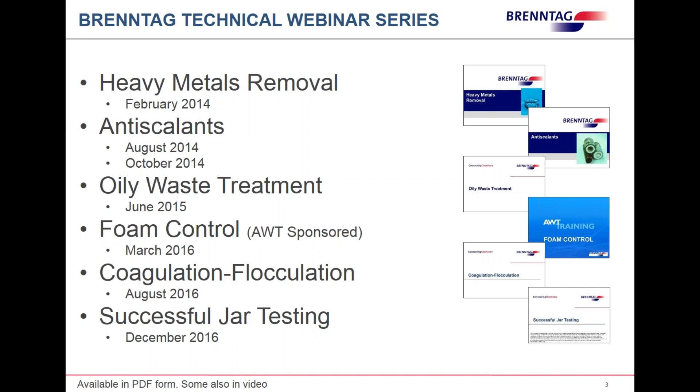Just to recap, our successful jar testing webinar lends itself to a precursor for this particular presentation, and these are just some of the topics we touched upon during that session.

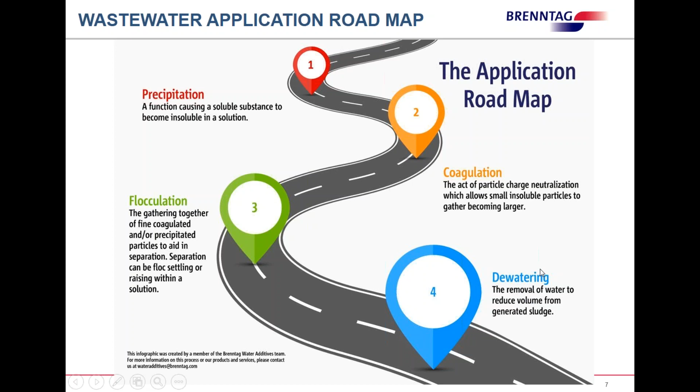Now, every successful trial has to begin with a jar test. This is a procedure that simulates as best we can the actual process of the wastewater treatment plant. In that, we use differing chemical doses and mixing speeds, and then monitor settling times or floating times, whatever the case may be. This is a way of estimating or providing an estimate of parameters in the water treatment program.

So what we're trying to do in the jar test is duplicate the system operation, check product performance, make system adjustments, make treatment recommendations, and determine the best program available to us.

In this process, it's important to make very good notes, as we'll cover in a bit, but also you want to be able to show your customer, once you've arrived at a process you believe is the best, to help get them to buy in - and this is another thing we're going to discuss later.

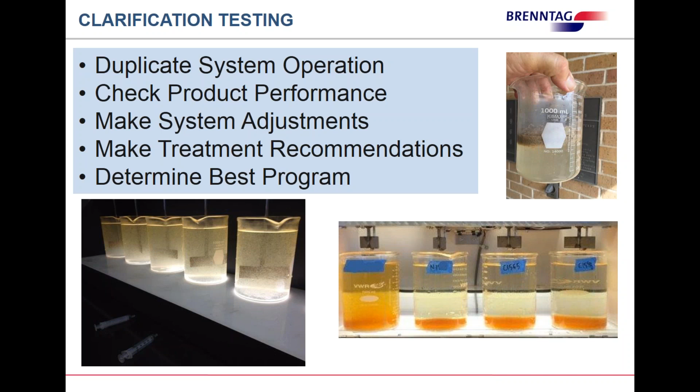Now, Thomas Edison's principles are a very good way to look at jar testing: you understand your customer's problems and get commitment, and iterate quickly to find a solution. What we mean by that is you're going to run multiple tests and run them as quickly as you can to find a solution, and the purpose of running multiple tests is to be sure you've come to the best solution for your customer.

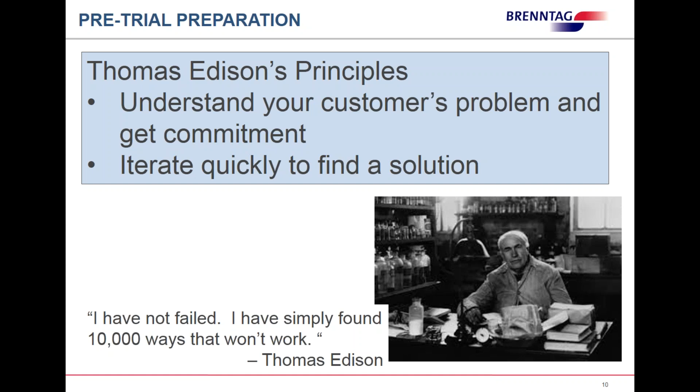And another way to look at jar testing is: I have not failed, I have simply found 10,000 ways it didn't work. Our webinar today will discuss clarification and dissolved air flotation.

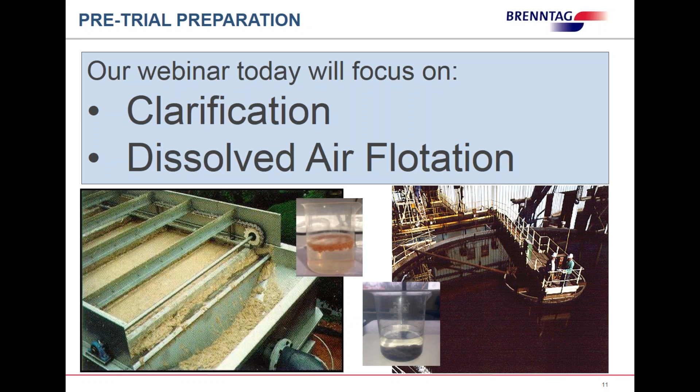What are your customers' goals? This is important in your pre-jar test meeting with your customer, and then you want to also cover these things as you move through into the trial phase.

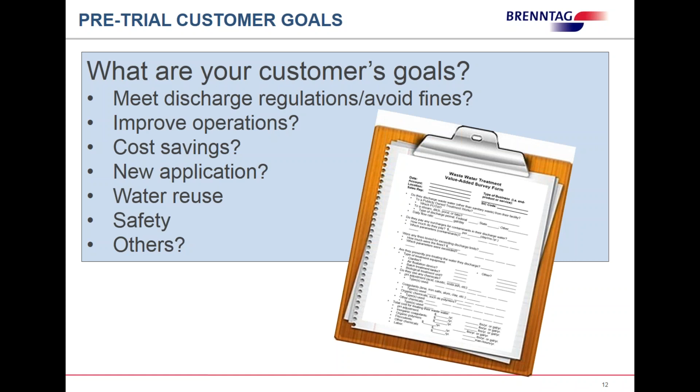You want to know, are their goals to meet discharge regulations to avoid fines? Is it to improve operations? To provide cost savings? Is it a new application? Is there an effort to reuse the water that you're clarifying? Is it a safety issue? For example, are they currently feeding a chemical that they'd rather not handle and get away from? There could be other reasons, but those are all things that you need to qualify with your customer to be sure that you have a very clear understanding of what their goals are and what your goals should be.

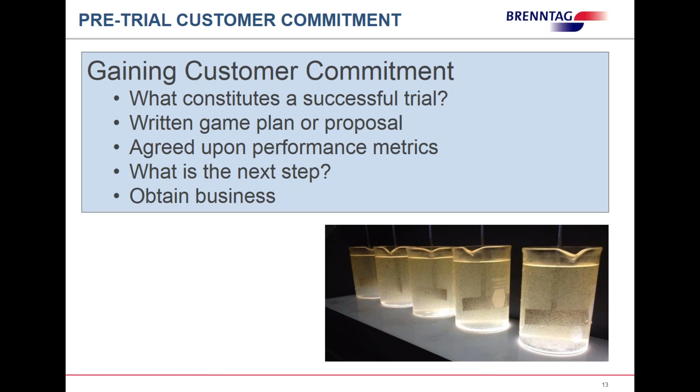This helps gain your customer's commitment, and what you want to do is have them agree with you as to what will constitute a successful trial. You want to provide a written game plan or proposal with agreed upon metrics, and then what the next step would be at the conclusion of the trial. At that point, we hope we will have attained the new business.

So we get customer involvement, management involvement, and this is important. You really need to know, just like any other sales situation, who the decision maker is, and also who needs to be included in all updates on the trial. It's important to know the customer's schedule, in particular if that decision maker may only have time to see you at lunchtime, at the end of the day, or first thing in the morning. It's important to know that so that you're not just standing around waiting for them, barging in on a meeting, or making them feel that you're putting them out.

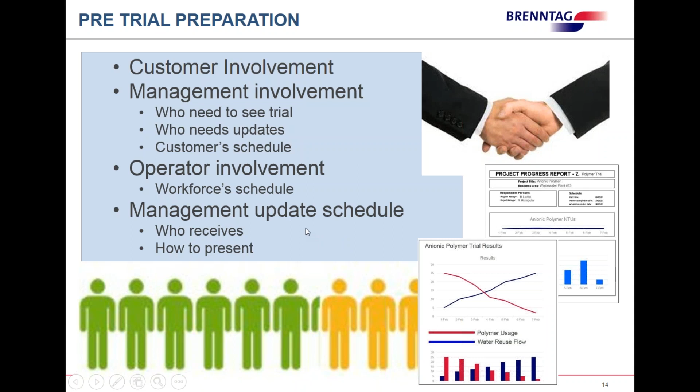It's also very important to have operator involvement, the people who actually will be charged with the day-to-day operation of your chemical program moving forward. It's important to know their workforce schedule, and then the management update schedule - who receives it and how to present that to the person. That could be what time of day, or would they prefer an email, or an oral follow-up. In either event, I would always recommend that you follow it up with written communication, either email or a letter, after you've met with the person, just to rehash everything and put it down on paper - what was discussed and any objections or agreements from those discussions.

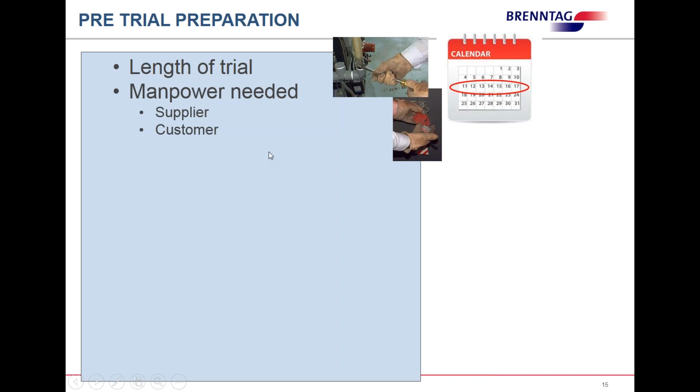Now, it's important to determine what the length of the trial will be. You're going to need to know manpower, both from your end as the supplier as well as the customer, and that would be the shifts or operators and what their schedules might be. The length of the trial is going to dictate how much product you're going to need on hand.

Your operating conditions come into play. For example, if you had a winery who does most of their bottling or packaging in the fall, that's most likely when they're going to see an increase in their wastewater influent. The production schedule may have something to do with it - that's a good example. But it could also be that one shift over another produces more water just because of the way their process works. And then, of course, you need to know your plant personnel schedule based on these factors.

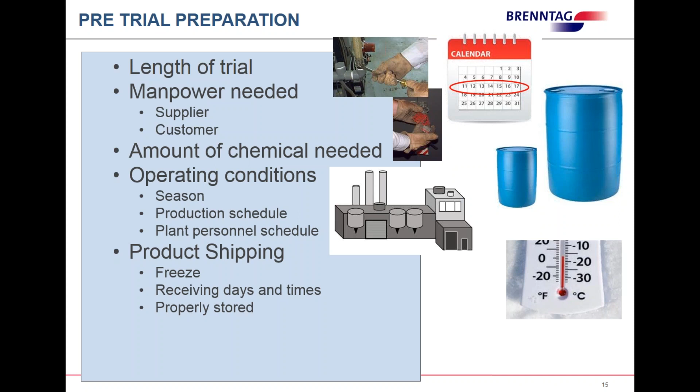Now, this is an important point that I can't stress enough. You want to make sure that you get your product to your customer in good condition. You want to know the receiving days and times and make sure that the product is properly stored. I personally had a trial fail on me because I had product freeze in transit and wasn't aware of it until we got to the bottom of the barrel and found out that the product had crystallized, and that we were not feeding as concentrated a solution as we wanted to, and as a result did not get our desired results in the trial.

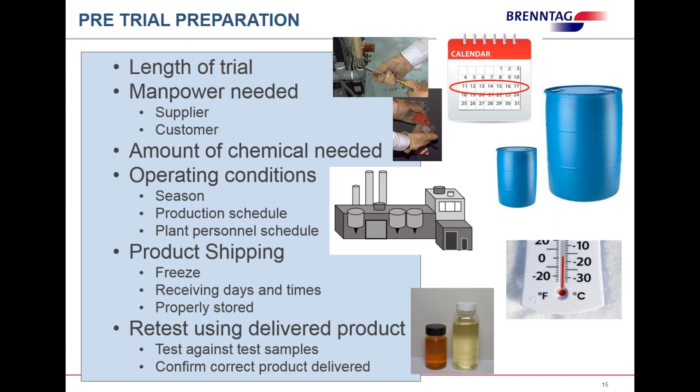This is important, and as this could have helped us pick this up, you want to retest using the product that arrived and is waiting to be put online for your trial. You're going to compare those against your samples that you used to jar test to come to this decision or treatment program to begin with, but then you also take the product you have on hand and jar test a sample with that and compare the results between the two.

Next, we've got to discuss the feed system that you have.

We want to know, is it a new or existing system? Who owns the current feed system? This is important—it could be a competitor, and the competitor may not want you applying your trial using their equipment. So it's good to know that beforehand, so you can make sure you have equipment in place to deliver your product during the trial.

Make sure the equipment's sized properly, that it's accessible, in the correct location. Was it installed correctly, either by the customer or by the supplier who supplied the equipment? Make sure it's operation tested, and does it need to be cleaned? This could be important in the event you have a product that might adversely react with the existing chemistry—could lead to a clogged line, or in the worst case, a reaction that causes gassing or fuming.

You need to know how quickly you're going to turn over the treatment. What we mean by that is, from the point you introduce your product, how long will it take for you to begin to see results in the system?

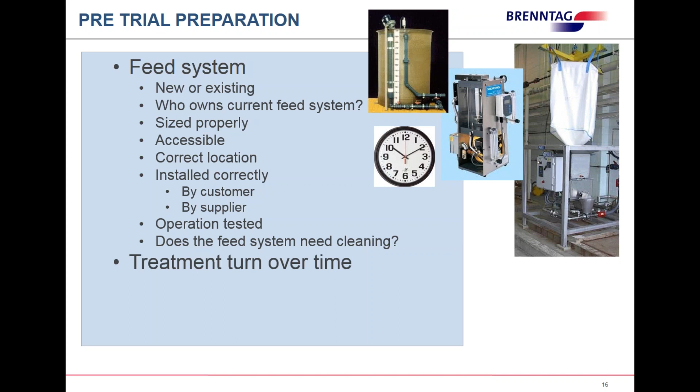Another way to look at this is to check proper feed checks and dosages using drawdown tubes. These are very important and helpful in calculating that you are delivering exactly what you want in the way of product to the system.

Make sure your feed points are proper, where you would like them to be, depending on how your jar test results were. Maybe the feed point currently in use doesn't allow for the same type of agitation you found—if you move the addition point back further in the system, it gives you better mixing and better performance.

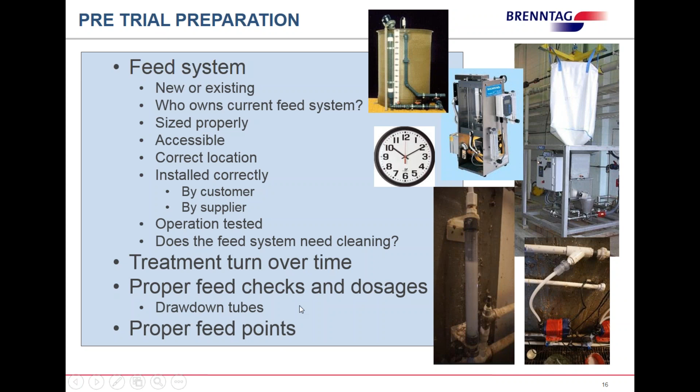You want to take your measurements of the existing chemistry before starting—meaning the incumbent product is online. Take their measurements of what they're feeding, how much they're feeding, the feed points, and the results, then record these results.

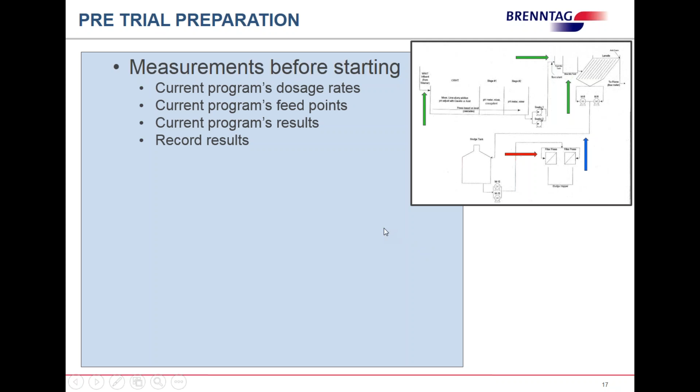You want to start a log now. This is the beginning of a log that's going to help you prove your point that your product performed the way you wanted it to.

Your system parameters are going to be part of this log. You have the agreed upon analytics that you went over with your customer, system flows, and plant production—all these things you want to note on your log.

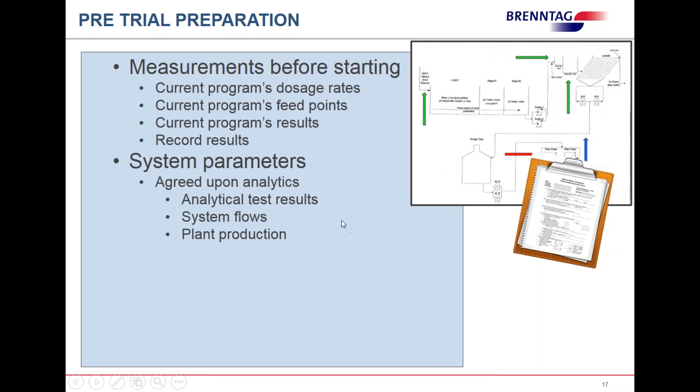You want to obtain your samples before starting, correctly label them, and store them properly. If your customer will allow—as you know, some don't want cameras in their plants—take a photograph, but of course you want to obtain approval first, and get a general feel of the overall operation.

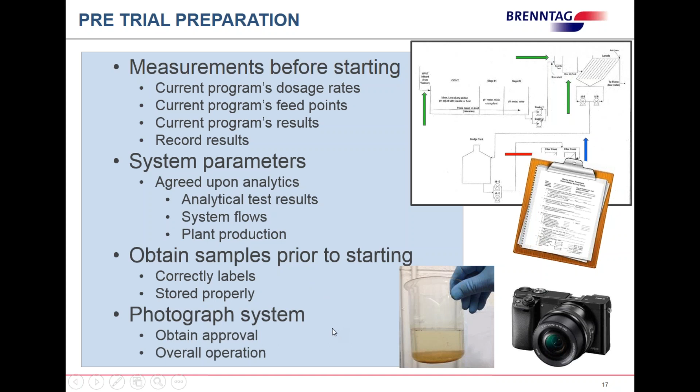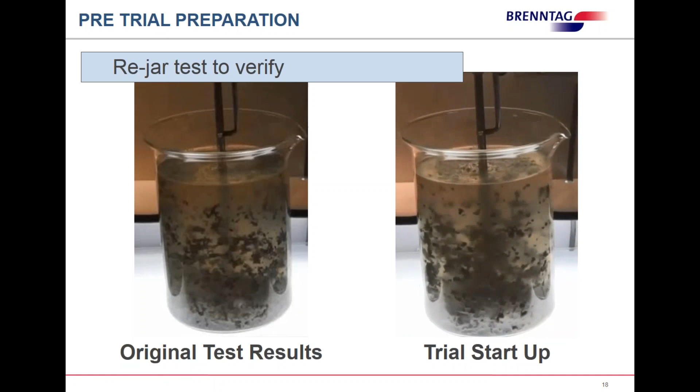Here we're going to discuss the re-jar test to verify. You can see on these two pictures we have the original results on the left—this is the original jar test—and the trial startup on the right. As you can see, we're getting similar reaction, similar clarity, and particle size. All of this would indicate that we have matched what we did in our jar tests before.

Now this is critical—you want to redo the math. You've done all your jar testing, you've dosed. Now you're going to check your math to make sure you can dose everything according to what you just did in your jar test.

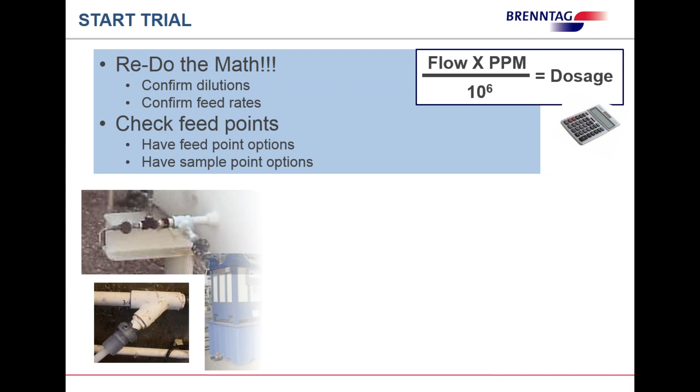You want to confirm your dilutions, confirm your feed rates. Check your feed points again and have multiple feed point options. As mentioned before about where the product is added—does it perform better in a different location?

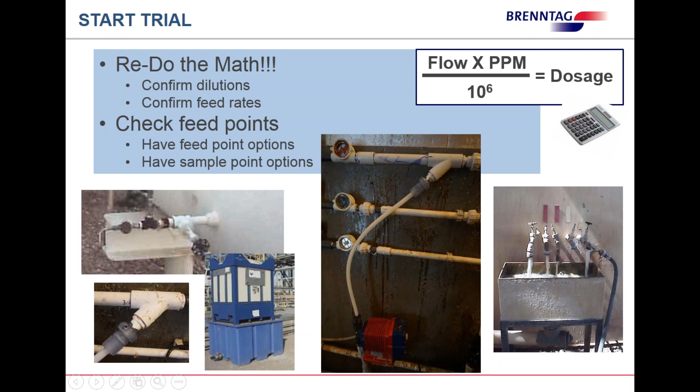And then you want to have different sample points from which to sample either effluent or, as we'll see later, sludge levels.

You want to photograph your tests, your operations, and record the date and time. Measure and record your feed rates, flows, operating conditions, and as much information as possible that you can put into your log without it becoming too verbose. You record your drawdown rates during this time.

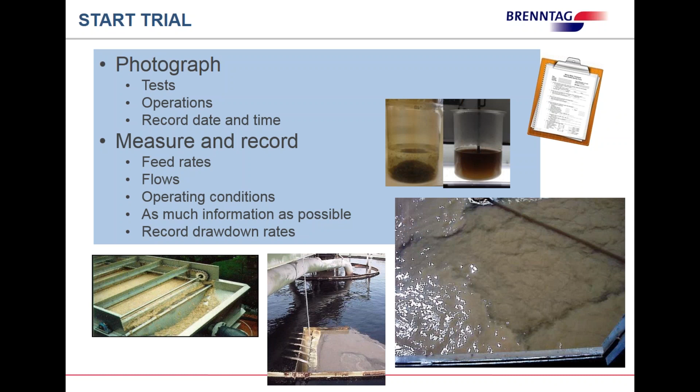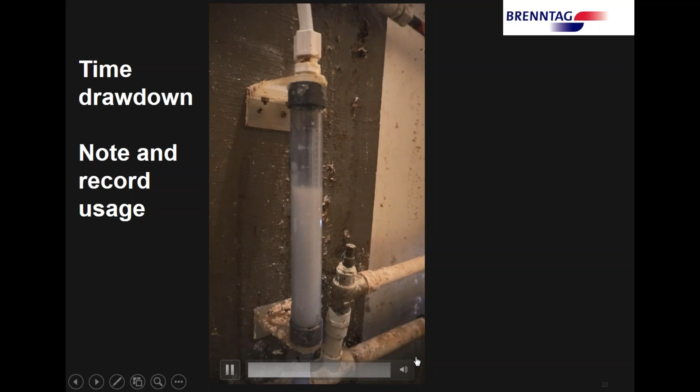And again, this is a specified time, and you're noting how many milliliters in that time. Depending on the application, you might be able to run a minute. In a large application, like a paper mill where you're talking millions of gallons, only 15 or 30 seconds may be enough to draw down because of the rate the product is fed.

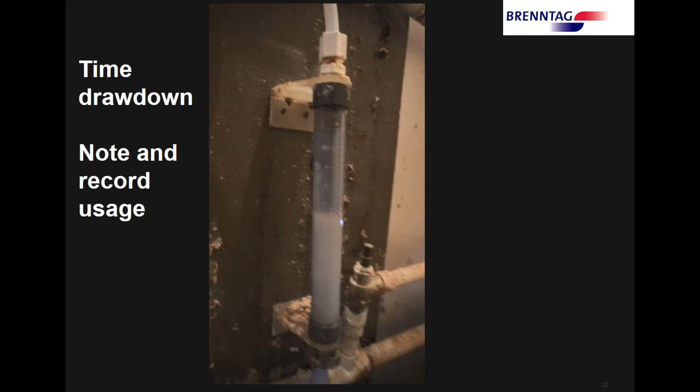So then the next step, you want to do this. This is just part of good housekeeping, because you have to remember you're probably not the only one accessing this equipment. The operator will probably be doing his own checks, and you want to make sure you leave it the same way you found it. So this is how to refill a drawdown tube.

You're going to open the valve from the feed tank, leaving the valve to the drawdown tube open, and you'll see the level rise back up. We're going to go all the way to the zero point up at the top there, and then you close it, and be sure to keep that valve open to the feed tank so that you don't air bind your pump.

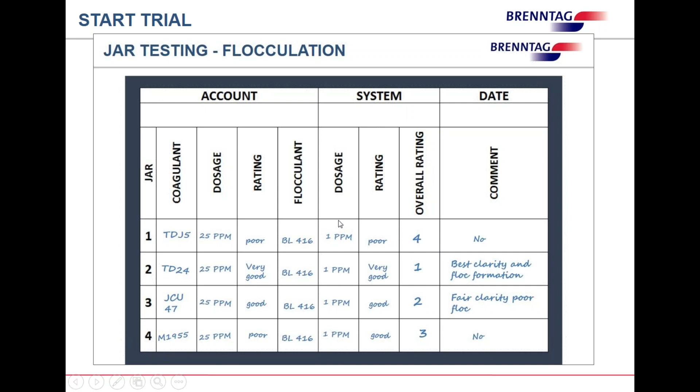So here's your hard data. You've got your product with the dosage. You've got your rating, subjective as we said, of very good, poor, good. And then this is the next step, our trial log.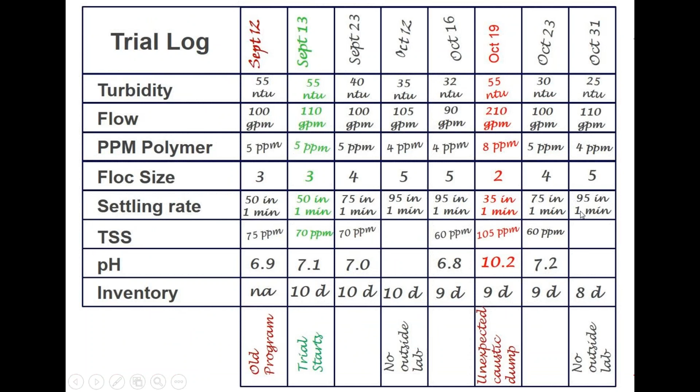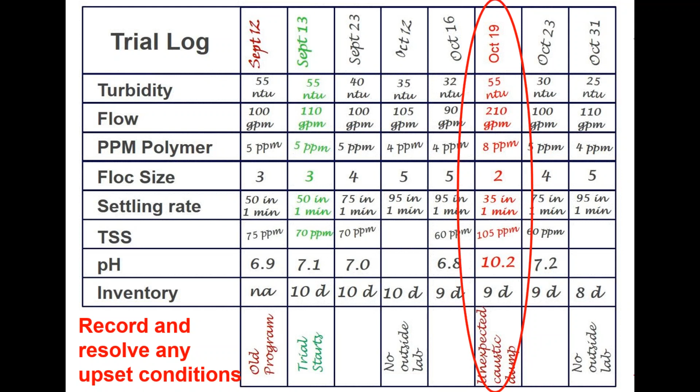Now, I want to point out, first you'll have the previous data, then the day you began and the time. And then you're going to see any upset conditions that you had during your trial. You want to have recorded what happened. If you look down here, you can see there was an unexpected caustic dump during this part of the trial. This is very important. It helps you detail in your summarization of the trial what happened, when it happened, and why it happened. You'll find your customer is much more happy to move on with your program if you have a very good understanding of what occurred during the trial, why it occurred, and the result. It'll also prepare you for future reactions to take as a result.

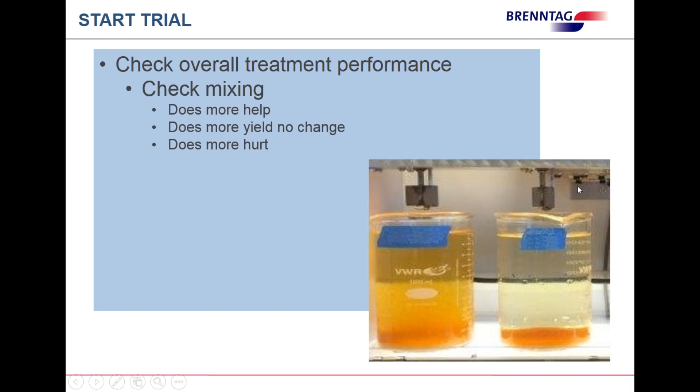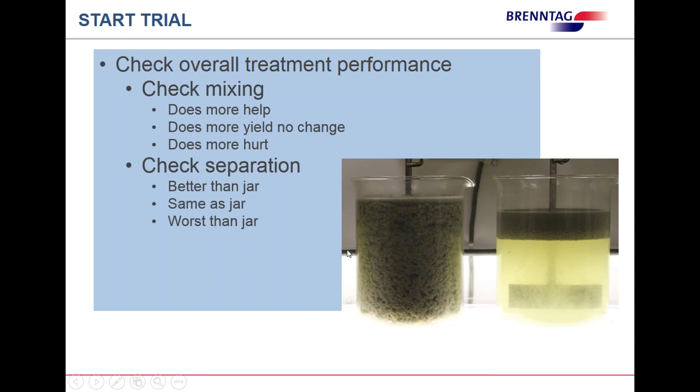Now, to check the overall treatment and performance, we're going to check your mixing and dosing. This is just grabbing a sample out of the process itself, putting it on your jar stirrer, and seeing: does more mixing help? Does less mixing help? Is it better, worse, or the same? Check the clarity. Is it what you expected? Is it the same or worse than that jar test you ran at the beginning of the trial, before the trial started?

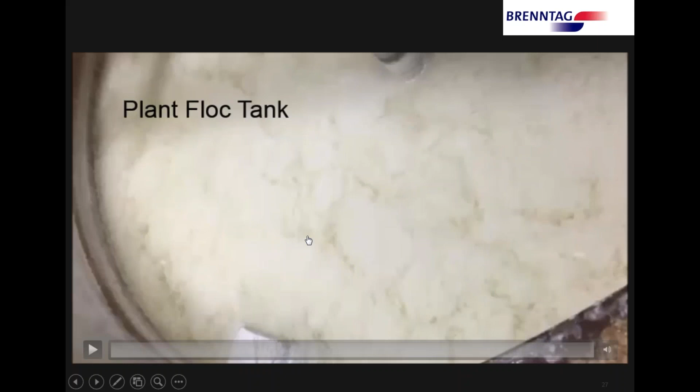This is a great indicator of what to look for in your floc tank while the trial is running. If you notice the billowy cloud look that you see here, this is the type of reaction you want to see from your products. You don't want to see large floc that are heavy, like big gigantic snowflakes. You want to just see a very good cloudy, cloudy looking performance like that.

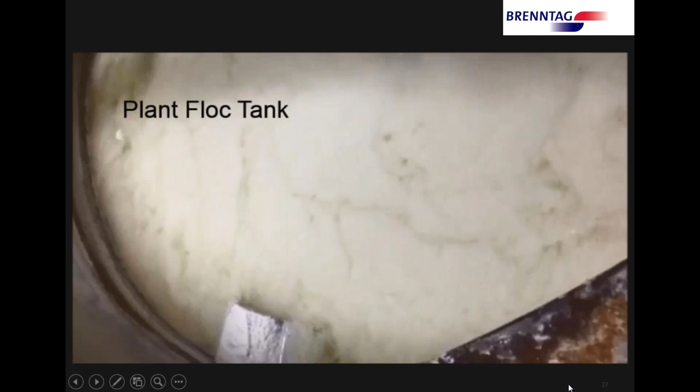If you were to see things floating, or see it settling too quickly, that may be an indicator that you need to cut back on your feed. Or if you don't see this kind of reaction, maybe you need to increase your feed. So you're checking for your floc formation. You want to note the size, the mixing energy required to get that, and the water clarity. You can see here we've actually got some separation that shows that clarity.

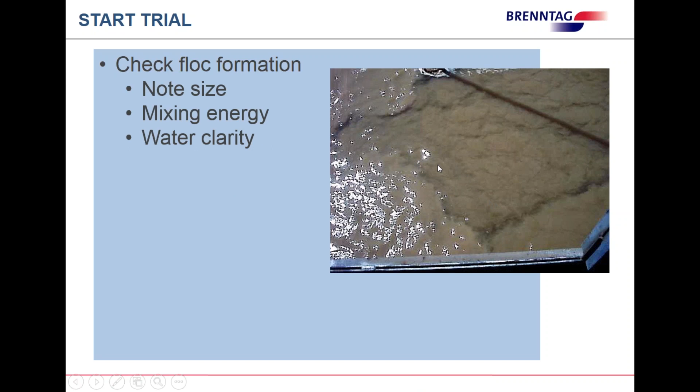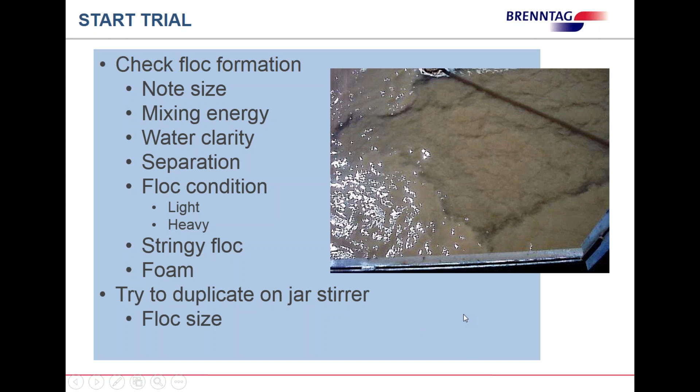You want to check the floc condition. Is it light? Is it heavy? Is it stringy? Is there foam? Try to duplicate it on the jar stirrer when these conditions happen. Any one of these, too heavy or stringy or foam, try to recreate the condition on your jar tester, because you might be able to determine, hey, I'm feeding too much of my coagulant as opposed to not enough of my flocculant.

You want to continue to check the overall performance, and what we're going to talk about here is your clarifier. What's going on in that clarifier? You want to document your sludge levels. You determine, are you creating too much sludge?

I know of a trial that was run one time that was performed so well, it created so much sludge that they couldn't process it fast enough, and gave them water clarity they had never seen before. So it's important to stay on top of this kind of thing.

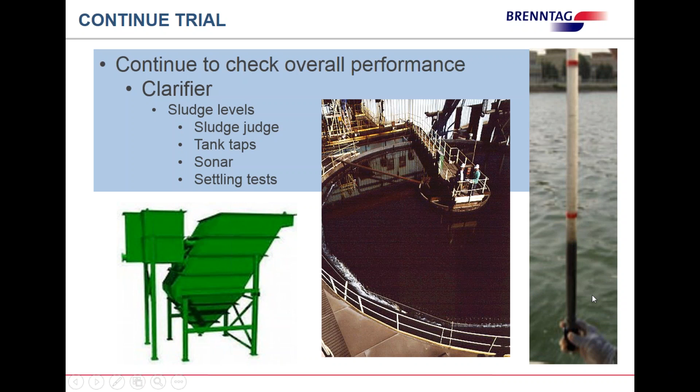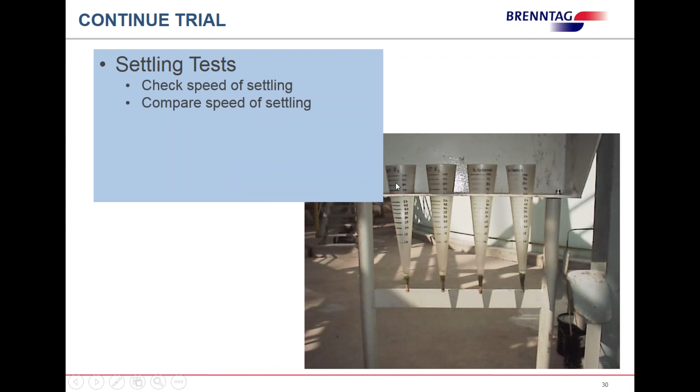Another way to do this is settling tests, using what are called Imhoff cones. We're looking for the speed of the settling, comparing the speed on the different samples, and checking the amount of sludge generated in the different samples.

In comparing your sludge generation, you also want to check your clarity. Look for pin floc or carryover—that's where you're looking for suspended solids, tiny particles that are not settling or floating. And look for floaters. All of these conditions could indicate either underfeeding or overfeeding your products.

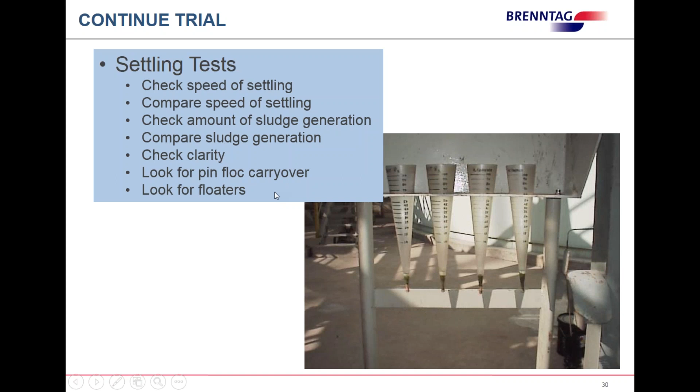By checking this during the trial, there's no surprises. You're not going to get a test result taken from the effluent that says you had high suspended solids during a period when it was sampled.

You want to continue your trial settling tests throughout the trial, and you can see here we had different reactions in these different cylinders. On the right, we have the pin floc, or particles that are suspended and haven't settled. Our middle cylinder settled the fastest, and our cylinder on the left took longer than all of them. So in our estimation, the best one would be the middle as far as performance goes.

So here we've got a slow settling one, here we've got our fast settling one, and then we have our suspended solid one that didn't settle as well as the other two, which could be an indication of undertreatment, or in some cases overtreatment.

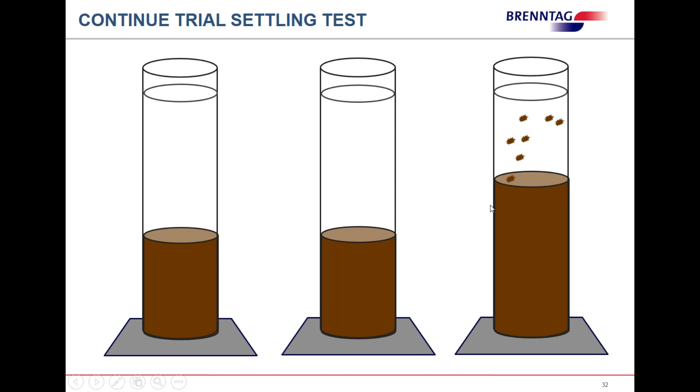Now for a flotation clarifier, things are a little different in that we're actually going to be floating the sludge on top of the water. What you want to monitor in this situation is your float blanket, how much is floating, and your air lift, the amount of air.

Look for stragglers—that means, do we have suspended particles that are taking longer to get to the top of the blanket, or not floating completely at all? Then you want to look for sinking floc on the other side, and check the recycle amount of the sludge.

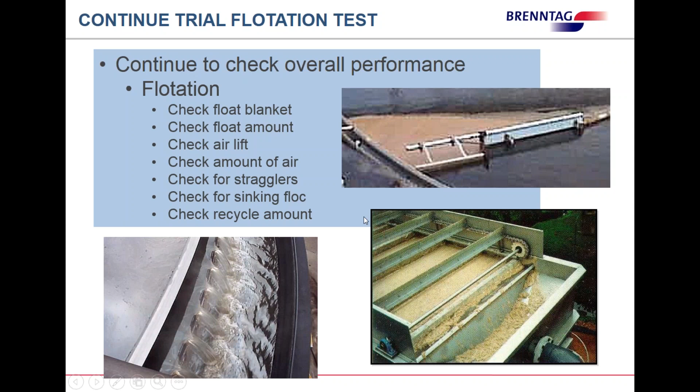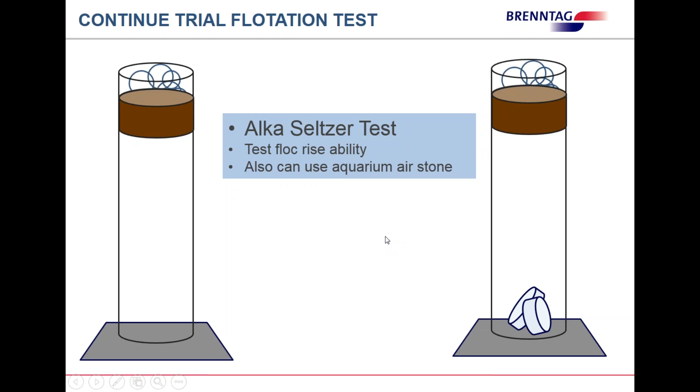So we're going to check our flotation test, and one way to do that is, if it's not going to rise on its own, you could put Alka-Seltzer into the cylinder, and it will create tiny little bubbles that will get your sludge to float. You can also use an aquarium stone if you feel so inclined.

Now, dissolved air flotation—this is a good example here. You can see going from left to right how these tiny bubbles will slowly rise, and the whole point behind that is that as they rise, they're attaching themselves to those particles, so that you form a sludge blanket that floats on top of the water.

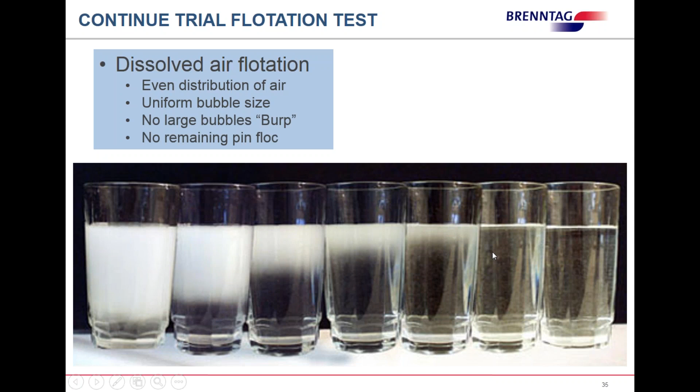The things you want to look for are uniform bubble size, an even distribution of air, no large bubbles or burps, and no remaining pin floc in your floated particles. Continue to check your overall performance.

Again, now we're going to look for things like turbidity, floc condition—is it rising or settling, what the rate is. Do you have any carryover? Do you have foaming? Check your sludge blanket levels. Check your sludge production.

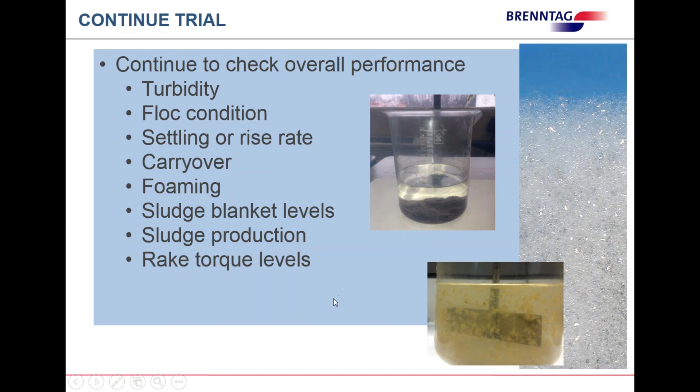Check your rake torque levels, and this is important. If you start to generate a significant amount of sludge, circular clarifiers have things called rakes in them, designed to pull the sludge into the center of the clarifier. If you put too much torque onto that rake, you could cause damage to it, so you certainly want to be ahead of that. And then check your recirculation rate of the sludge and other application parameters.

Now this is important. You want to discuss manning your trial. You should have discussed this before the trial began, but you need to know it's your job to watch your own trial. Do you need to split time? Do you need to have weekend coverage? It's important that this not necessarily be a one-man show, because if this is a 24/7 operation, you're going to need to have people there all around the clock.

And so you take turns. I remember doing it 12 hours on, and I went back to the hotel and slept, and then my partner, I relieved him, and he went back and slept. So we did that for about a week.

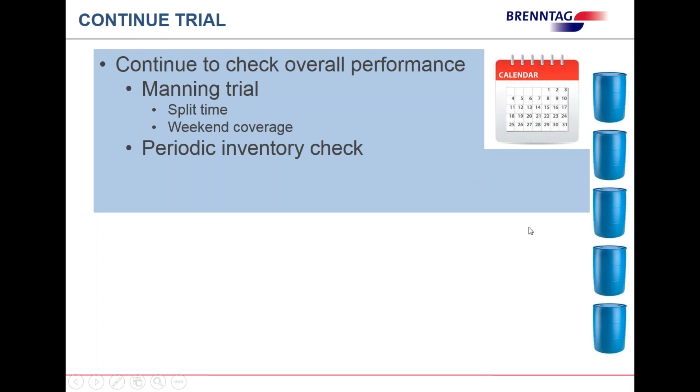You need to periodically check your inventory. This could be a problem if you're not watching your feed rates. You could have a situation where you run out of product prematurely, and that wouldn't be a good thing. You predicted to your customer that you were going to use X amount, and you wind up using, say, a third more, or maybe double. Then that could cause some problems for you.

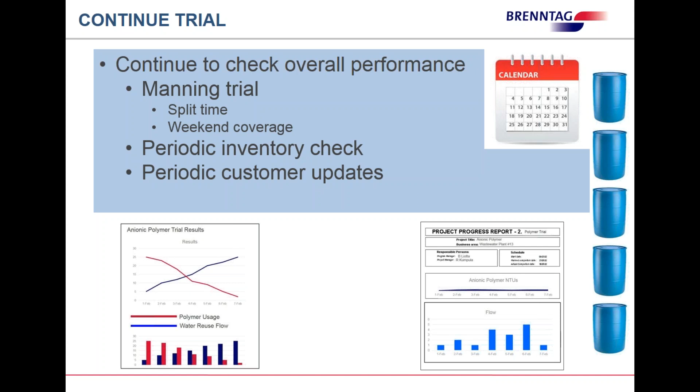Remember to give your customer periodic updates, and then continue to reinforce those agreed upon performance parameters that you discussed at the beginning of the trial.

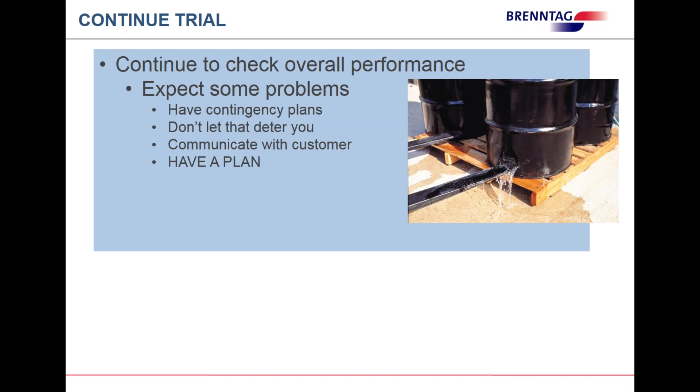This is important. You can never expect it to go smoothly. There's a little Irishman named Murphy who will run wild on you at times. Expect some problems, have contingency plans. Don't let that deter you, and communicate your plan with your customer. But most importantly, you have to have a plan.

Expect the unexpected. Things to expect, and this is not something you'd ever want to hope to run into, but sabotage. It could be from the incumbent competitor, or it could be an operator who's very loyal to the incumbent competitor, and wants that person to keep the business.

Never rule out anything. I had, not in a wastewater treatment application, but a different application in the feeding of a biocide. The ceramic balls from the liquid end of an LMI pump were moved so that the pump didn't remain primed, and I could not feed material. It wasn't until I was standing there watching the pump come on and watching the product struggle to get up the discharge line that I tore the pump apart and found this situation the way it was.

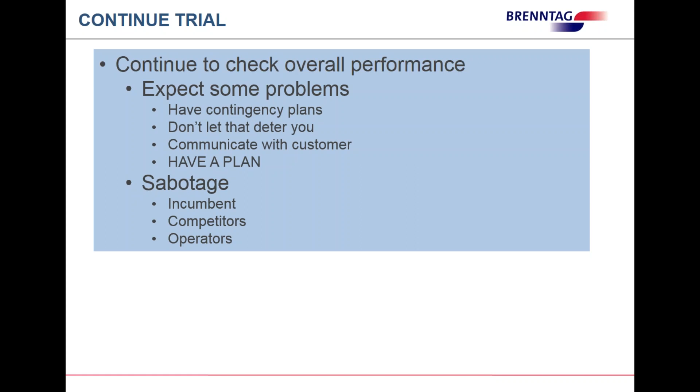Now you're moving to the trial conclusion. You're going to present the results. These periodic reviews that you've had with your customer will yield no surprises for you, and no surprises for your customer. Your decision maker's already been identified, and the recipients who are going to get this information have been decided on, and the format that you're going to present this to them has also been decided.

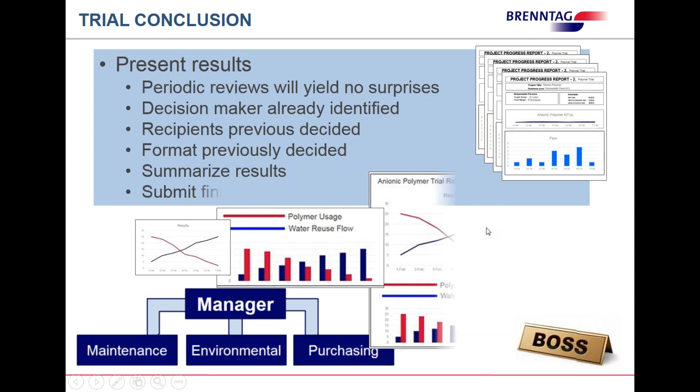And you want to summarize your results and submit a final proposal. Factors to consider at the conclusion of the trial.

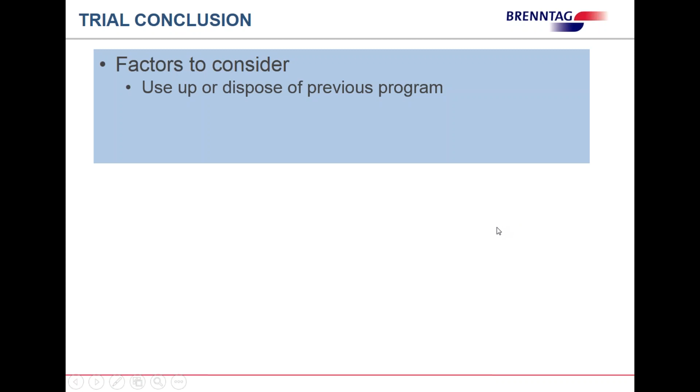Do you want to use up or dispose of the previous program? I always found that made the customer feel much better, that you were willing to use up any inventory they had on hand. Notify purchasing to discontinue ordering the old program.

In most cases, the person that's going to make the decision might be the one placing the order, but never assume that. You could have a purchasing agent who is unaware that the trial ran and that there's a change going to be made, and your contact decision maker might have a lot of balls in the air and forget to notify that purchasing agent. So it's always a good idea to make sure that all the I's are dotted and T's crossed in this regard.

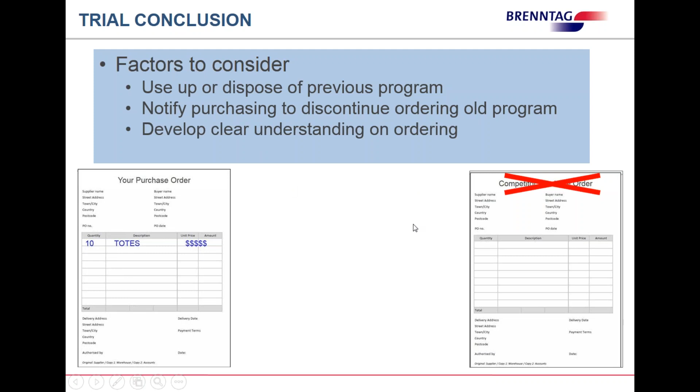Develop a clear understanding on ordering, and make sure you're fully stocked to continue. That's important. Let's say the trial is going along very successfully, and your customer says they're really happy, they want to just keep moving forward. Make sure you have product on hand, because the last thing you want is for them to have to wait for your product to arrive. In the meantime, the competitor gets an opportunity to put his product back on and could do something to save the business.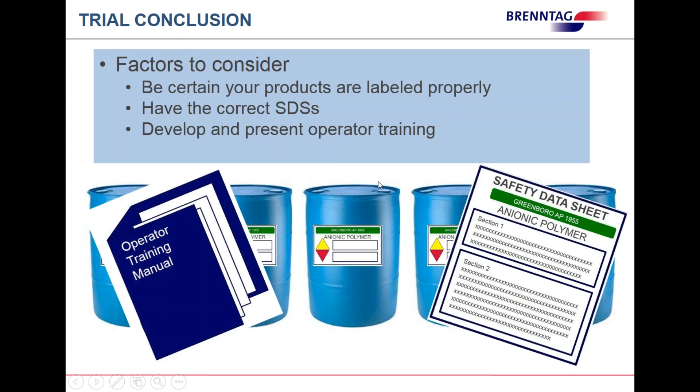I always liked to make sure that the operator was very well aware of what I was doing during the trial. Really, you don't have a problem with this. They're usually very curious to see how things are going and what ideas you have to bring to them. They usually already know how the process is working, but having it written down is always a good idea. Make sure that your contact information is available to anybody that would need to contact you.

Well, I want to thank you, and at this point I will turn it over to you for some questions.

Let me give you the mic. We had a few questions come up.

The first one is, how long would a trial run?

Well, I think that all depends on what you agreed on with your customer. I would say that in most cases you'd want a minimum of 3 days. A week is good, but optimally a month, because the more conditions you can see and improve your chemistry on, the better you're going to do in terms of winning the customer over.

Okay, thank you. We had another question come up. Basically, can you speak to maybe using a pump curve to decide dosage rates?

That's another good question. Any of you know that the pump is rated to do X, and I always found that the pump right out of the box probably pumped a little bit better than what it said. So using the pump curve, if we know we got 10% speed at 100% stroke length, based on the output of 1 gallon per minute, would that be 1/10 of a gallon per minute? That's a good judge, but again, there's nothing to take the place of a drawdown tube to confirm that for you. All right, thank you.